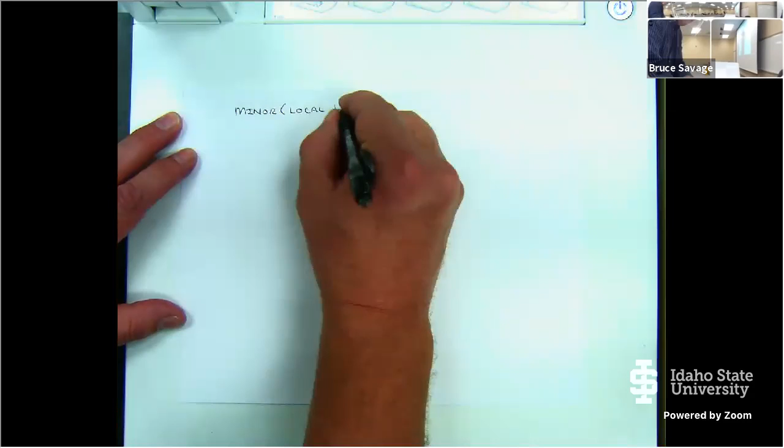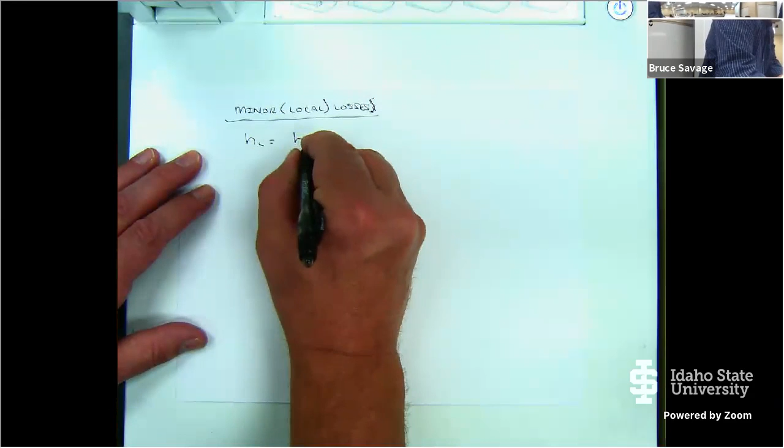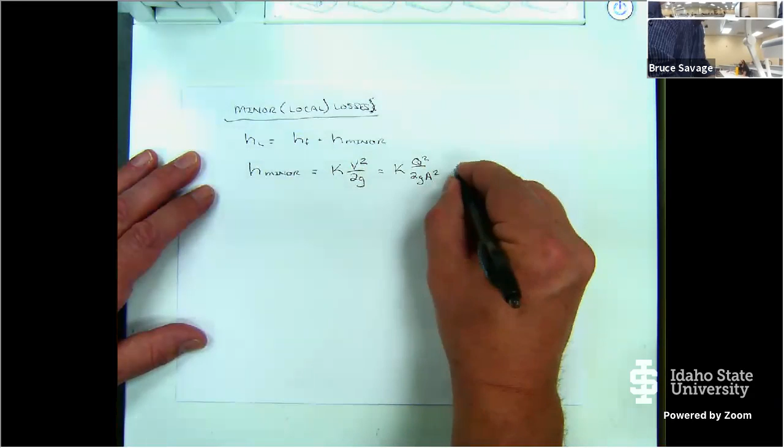or local losses. And these, minor losses, we've already defined equation-wise in this class. We said that the total head loss is equal to the friction plus the minor losses. And the minor head loss is equal to K times V squared over 2G, or we could change that to K times Q squared over 2G A squared, where dimensionally this has units of length. So it is a head loss, just like friction loss. It has units of length because the velocity head has units of length, and K is dimensionless. K is the minor loss coefficient.

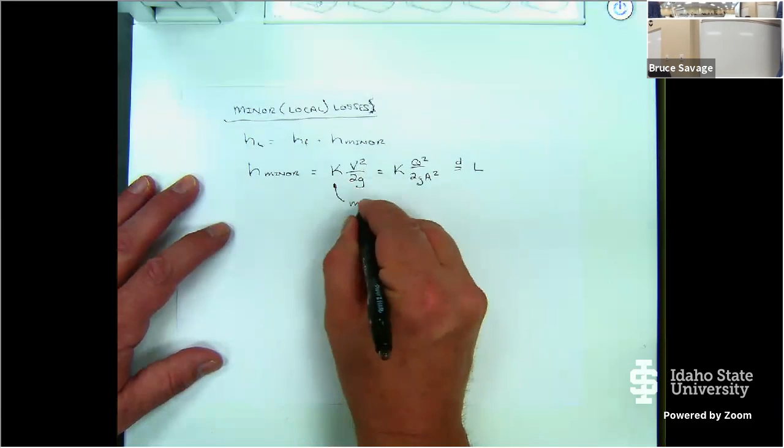So minor loss coefficient. We typically find K by looking it up in some table, on the internet, in some book, or from the manufacturer. A lot of times manufacturers will supply Ks for select items. You're probably not going to find it for a pipe elbow - if you go down to Home Depot, you have to pull that out of the table. But if you're buying a select valve, most likely the manufacturer has already had it tested, and they'll give you a K value, or they should if they're a decent manufacturer.

I want to note this because your book covers it in one section. There are other ways of finding the minor head loss, and they are actually more physical, more physics-based, using the momentum principle, but they're very academic, if you will. They're not very practical, so it's better to just use what's used in practice - it's quicker, it's simpler, and it works.

The part in the book that talks about flow going through an expansion does a momentum analysis - it's great to help understand fluid flow, but it's not used in practice. So I'm going to move this, and hopefully you guys can see what's on the board.

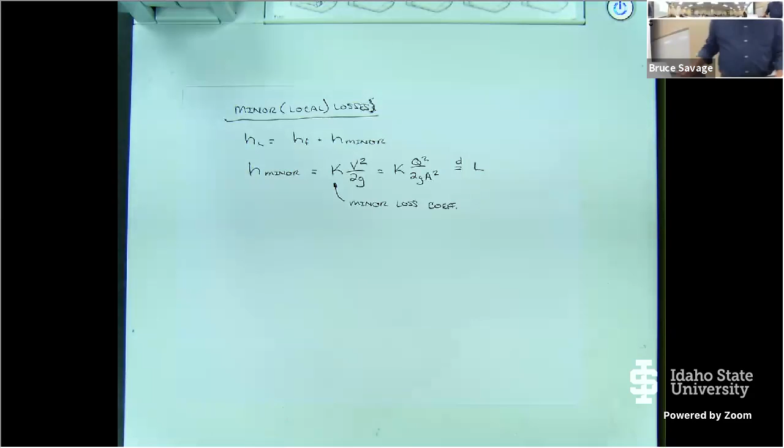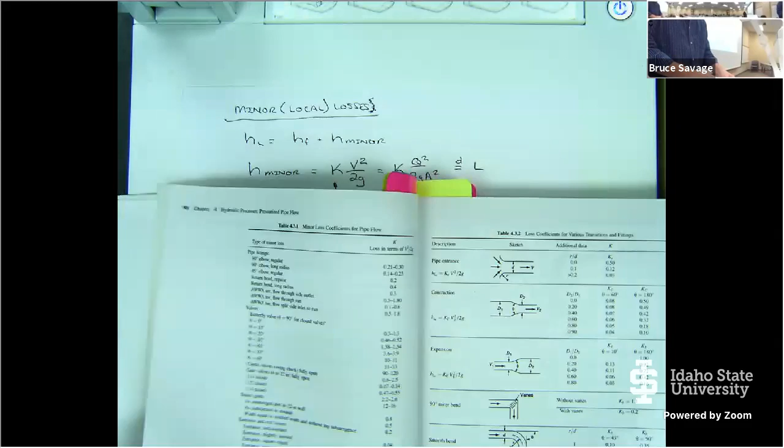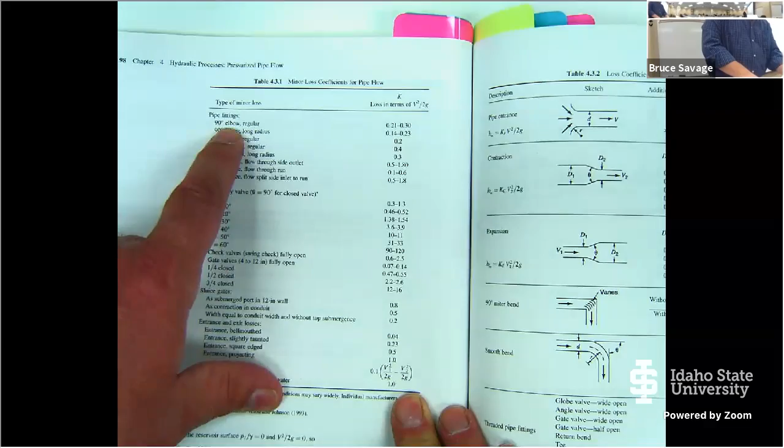If you open up your book, we have in chapter 4, table 4.3.1, minor loss coefficients for pipe flow. Let me zoom in here a little bit. It's just not very focused, is it? Well, I don't know how to bring that in better focus, but you've got a 90-degree elbow at the top, regular. Let me zoom in on that - maybe that'll bring it a little better.

Okay, and you can see that there's a range. Now, in the absence of any better information, you're going to take the middle of the range. Why would we necessarily take the extreme of 0.3? What would be the rationale of why not take 0.3 rather than say 0.25 or 0.26?

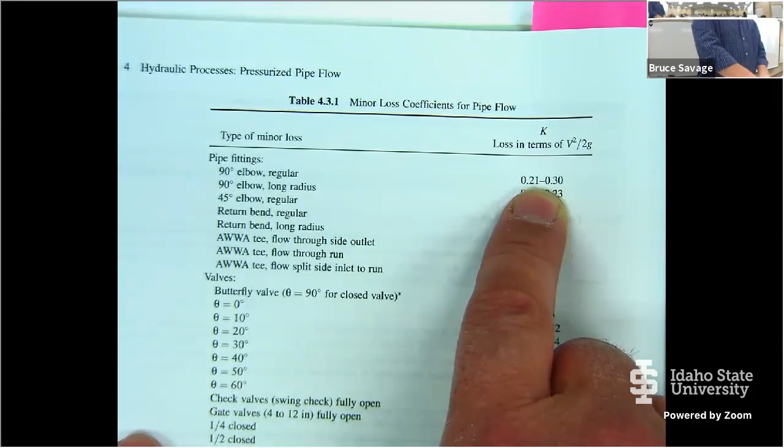I mean, we're engineers, we tend to be risk averse. So wouldn't it be better to be more conservative and pick the higher value? And that argument is indeed true - it would be more conservative to pick the higher value. But would it be better? Well, it depends on who you're trying to please, right? And there you go, cost comes into play. It's very expensive to put pipe down in the ground. So unless you have a valid reason, you don't want to over-design your project because it's going to cost a lot of money going in the ground, and it may not be worth anything.

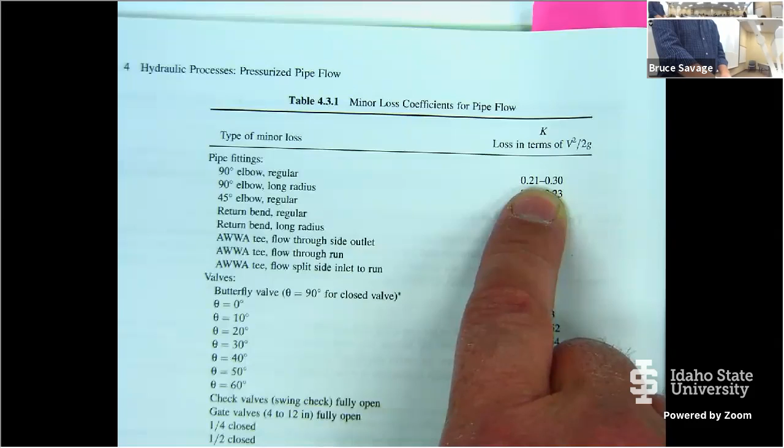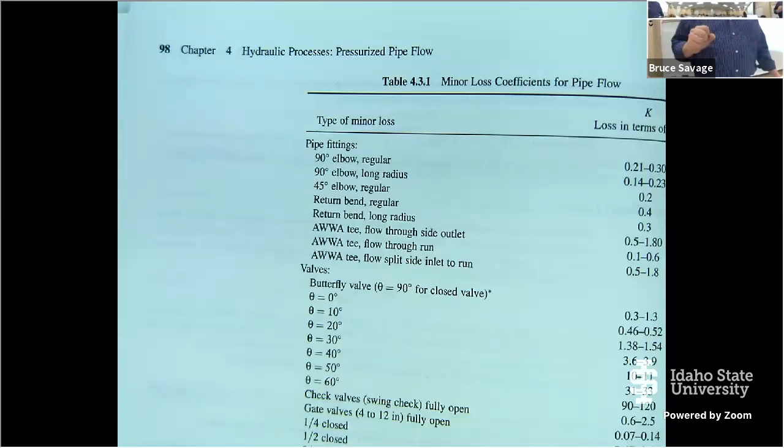And that's why we hire engineers. You guys heard the definition, or the difference between an engineer and an architect? You guys ever heard that? No? Is anyone here related to an architect? You better check online - I don't see any hands. Okay, good, I can tell this joke. The difference between an engineer and an architect, civil engineer and architect, is a civil engineer can do for $1 what any fool can do for 2, and an architect can do for 5. Okay? Now think about it - they like to do things really fancy, and I like to poke fun at architects, but you know, they actually do provide a good service.

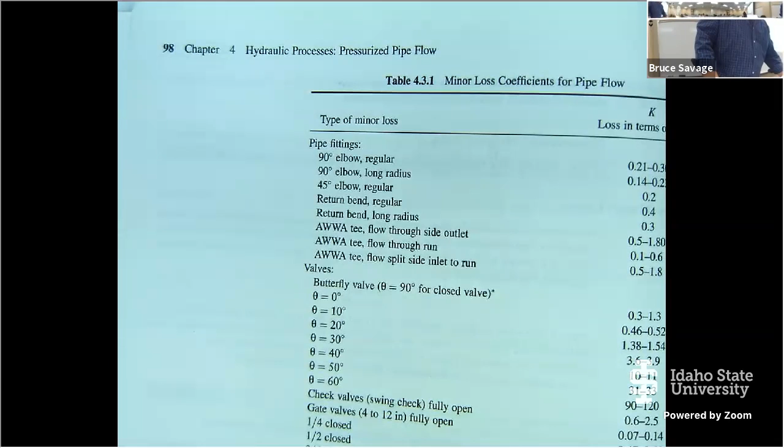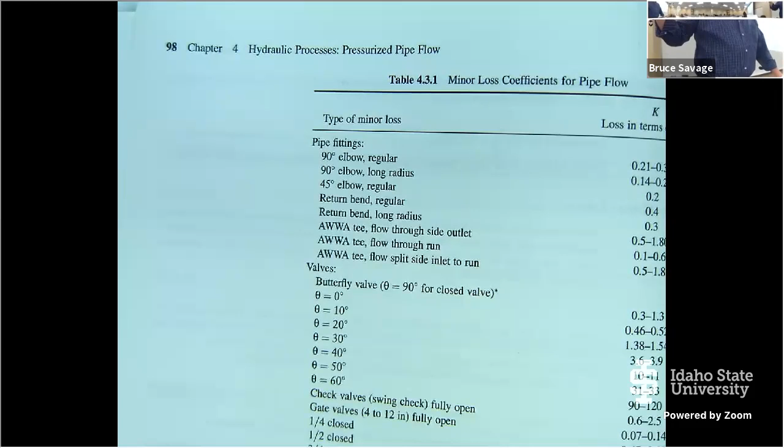But for most of what we do as civil engineers, the second part of that joke actually has significant meaning. A lot of what we do, most people could do, given enough money, right? You want a road somewhere, could they go out and build a road if they knew how to work a dozer? Sure. Would that road last? Would it be high quality? Would the cars put potholes on it and all that sort of stuff? Well, probably. It probably would over time. So we know how to do things using the properties of the materials to last longer and to save money.

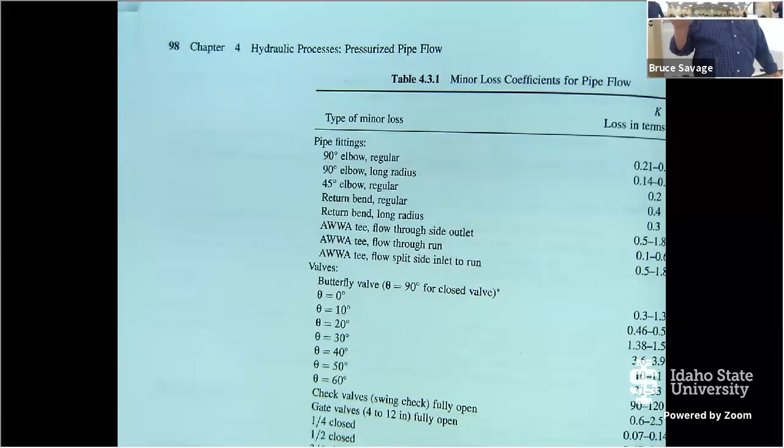Now, there are select things that we can do that they can't. And I'm not trying to diminish what we do as civil engineers. But building a building, you know, we throw up a beam. Well, could they just oversize it? Well, sure they could. Now, would that be as good in an earthquake? Maybe not, because sometimes when you oversize things, it's bad. So there still is this select area where they couldn't, but a lot of what we do, given enough money and time, yeah, sure, they could do it.

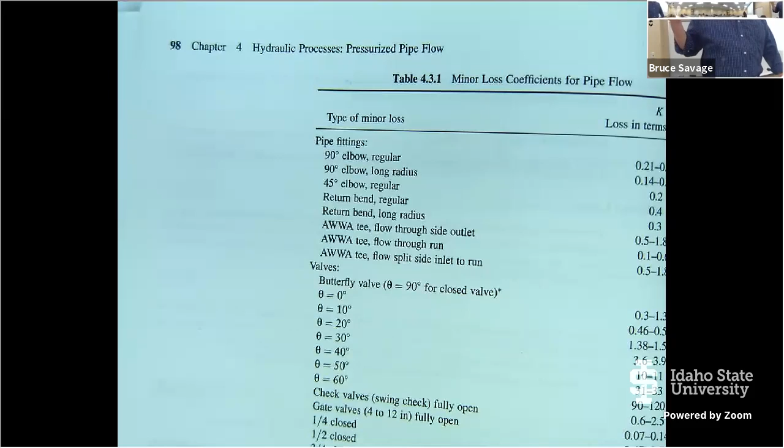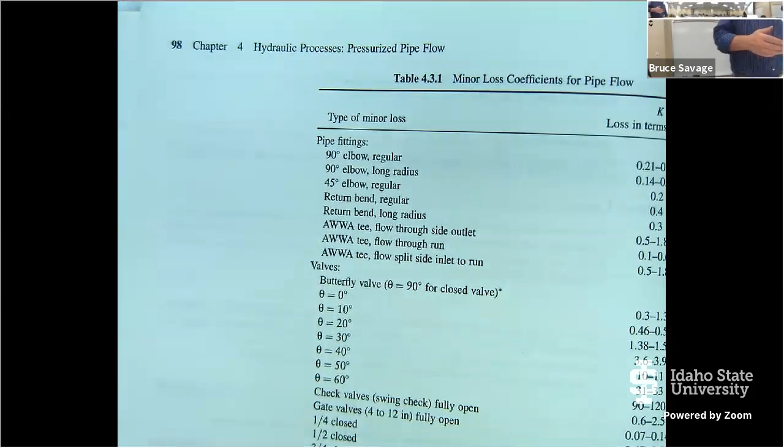Okay, so we want to save money, but at the same time, we want to make sure that it's safe, reliable, lasts - we get a good life cycle out of it. So while I'm preaching the benefits of making sure that we use correct values here, reasonable values, not extreme values, I'm also going to share another story, because I don't get to teach the engineering hydrology class, and I used to be able to teach that one.

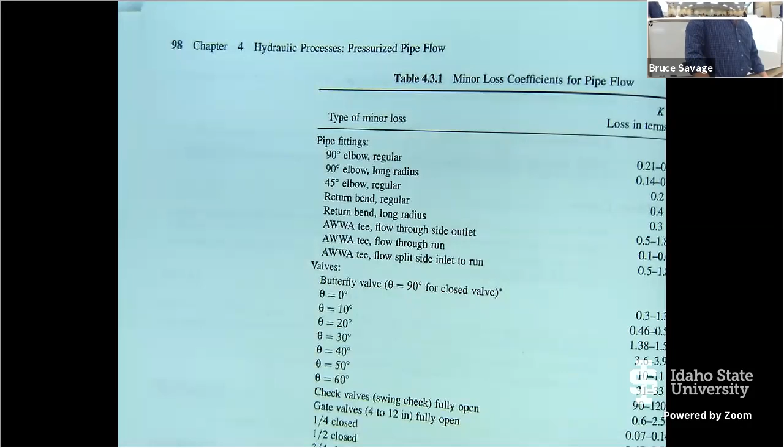Just being chair doesn't allow me the time to do that. But when I was working down in Louisiana at McNeese State University, I had a guy contact me. He was another engineer, a chemical engineer, reasonably intelligent, but he just built a house in a neighboring town in a new subdivision. And Louisiana, as you may know, has problems with flooding.

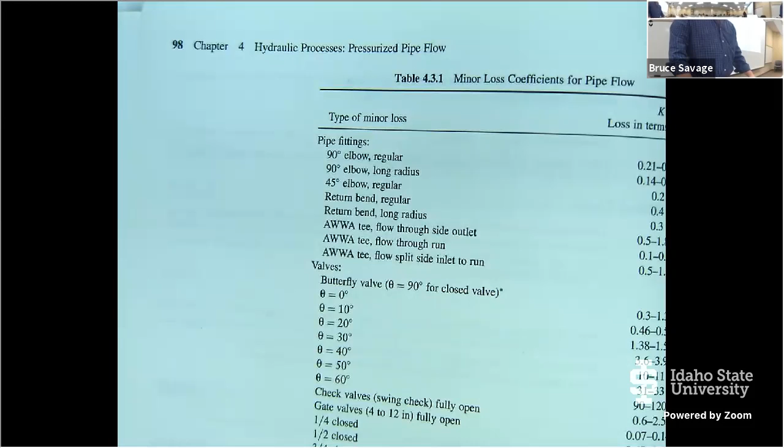Lake Charles has problems with hurricanes right now too. I've heard you guys talk about wind, and it's been pretty amazing to see the wind that has occurred around here, because I've had some neighbors that lost trees and I've been picking up branches the last couple of evenings. But I'm glad I'm not in Louisiana right now. We lived there, went through one hurricane, and have friends down there and see what they're going through now. It's way worse this time.

But anyway, I diverged from the story. So they get a lot of water down there, all right? 40 inches a year, approximately, is what the rainfall rate is. So, you know, 4 times what we get up here.

Brand new house, and had lived there 3 years and already had flooding issues in two of the years. Now, the flooding issues weren't terribly serious as far as getting in his house, but they'd come right up to his threshold at his door. He's like, this is not good, you know. These weren't even bad years. It wasn't a big storm, and he's like, we got to take care of this water.

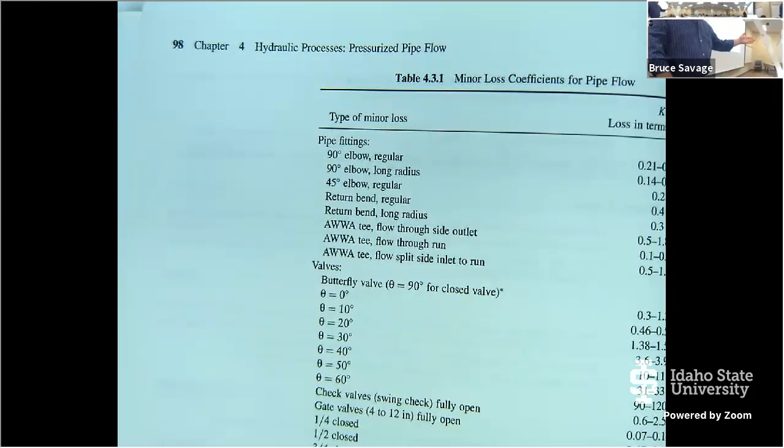The developer wanted to build more houses, and had a plan, went in and wanted to get the plan approved, and some of the people that already lived there showed up and said, well, we think there's a problem, we need to resolve this.

Well, if you remember engineering hydrology, most of you, I think, have taken that. There's two methods to calculate peak flow, peak discharge. Well, there's more than two, but two common ways for relatively small areas: the rational method and the NRCS method, right? Or the SCS - depends on if you go back far enough, it's the SCS, or TR55 is another name for it. And both of them calculate peak discharges, and there are assumptions in each of them, all right?

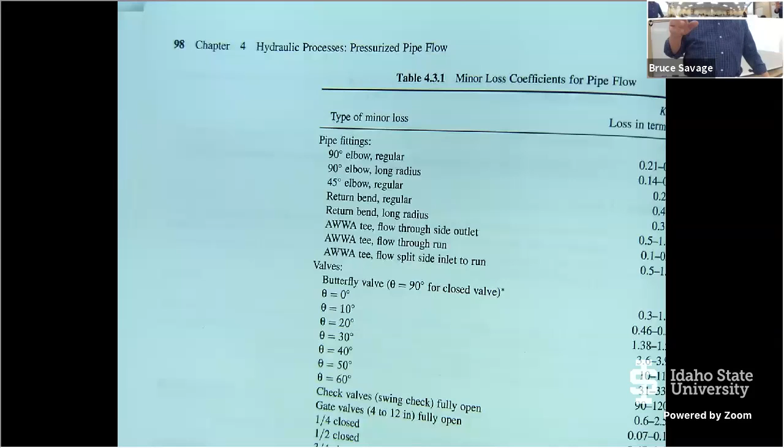So he brought me the set of plans. So the developer went to what's called the police jury, which is essentially the county commissioners there. It's a different system down there. And they looked at it, and fortunately the parish engineer - because they're not counties, they're parishes - said, well, we got a lot of people complaining, so, I don't remember exactly, it's been too long, but I think he used the SCS method, or no, he used the rational method.

And the county engineer said, well, why don't you go use the SCS method? So he did. Well, not only did he use parameters that were extreme on the other end. Rather than like the 0.3, he used the 0.21. And the SCS method actually proved to be less of a peak discharge.

So when he wrote up his report, that's what he did. He said, I compared these two methods. This one, look what this one provides. It's half the flow of this one over here. So we want to use this one because it costs us less to put in infrastructure.

Now you think about that, and so I explained it. This guy didn't want me to really, he wanted me to explain the concept and he was going to push it forward. So I did. I sat down and explained the two methods to him, and I said, this is borderline unethical to know that one method produces a certain flow rate, the other one's lower, so you're going to pick the lower one when you already know that there's flooding issues out there. Now, if you didn't know there was flooding issues out there, then I guess you could argue it. Like, yeah, I'd be a little mad too, you know.

And I don't know whatever happened. We moved soon after that. But my point is this: use a little common sense. Realize that you have a reputation, your personal reputation, and so you want to do a good job on both sides of the coin. You want to save money for your client, but also make sure that the project is doing what it's supposed to do.

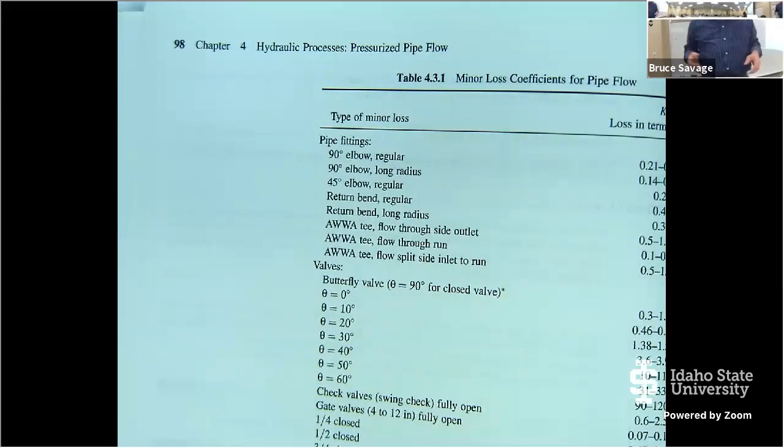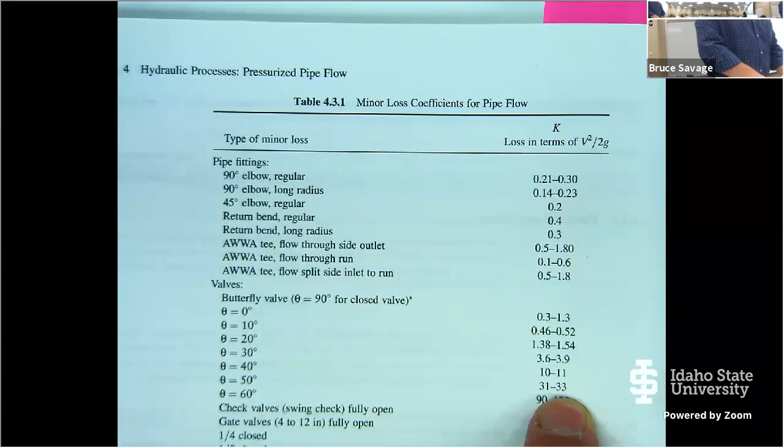Okay, so enough on that. Back to this. As we go down through here, you'll notice that butterfly valves have different K values. That's based on how open they are. And that's true for all valves. The more you close a valve down, the higher the K value is going to occur. The higher the K value, the more head loss through your valve, which means you're burning up energy in your valve, but then you can control the flow by increasing the head loss. So you have to do a little bit of adjusting there.

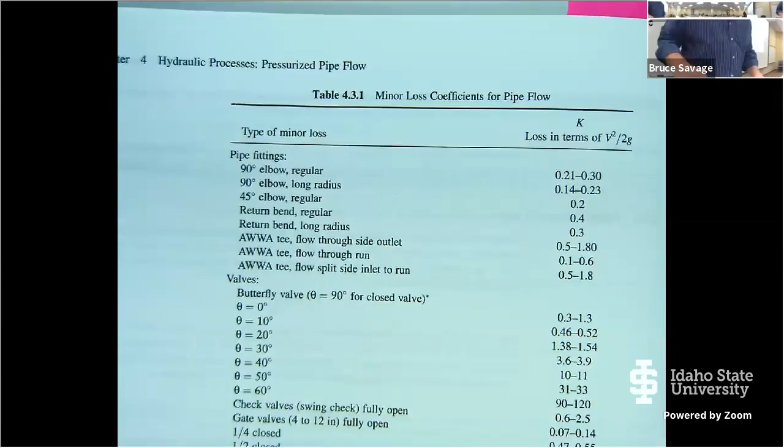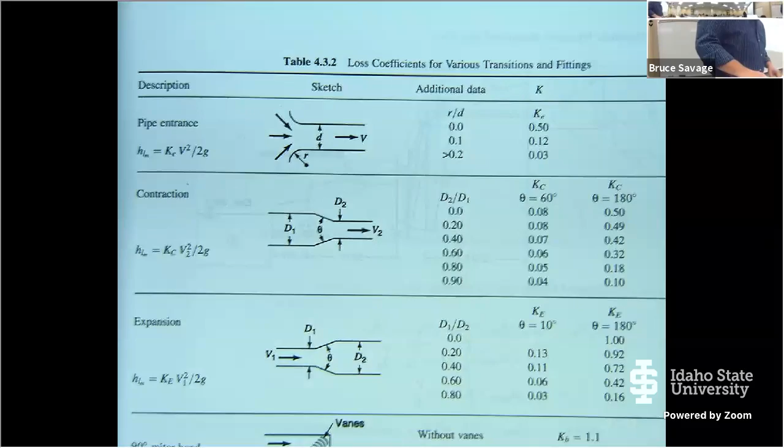We've also got some stuff over on this page here for different expansion contractions. It can be based on the radius, so you have to kind of look at the diagram and say, all right, what is my radius compared to my diameter? And that's going to give me then my K value over here. So our book has a reasonably good resource there. It's not complete by any means. And if we jump back to chapter 12, where we talk about pipe networks, they have a little more information here.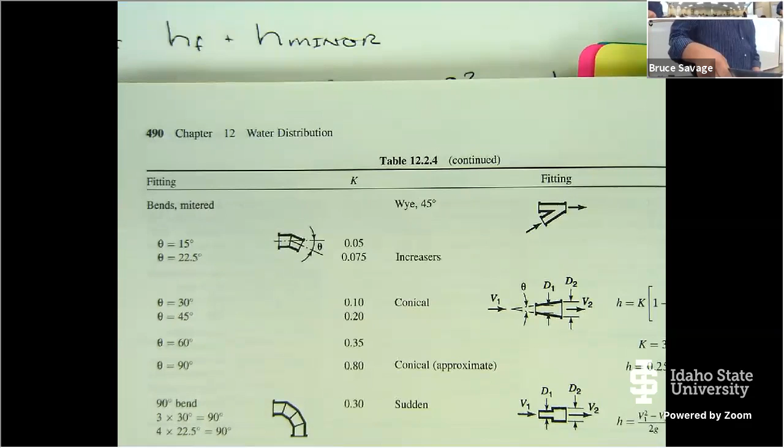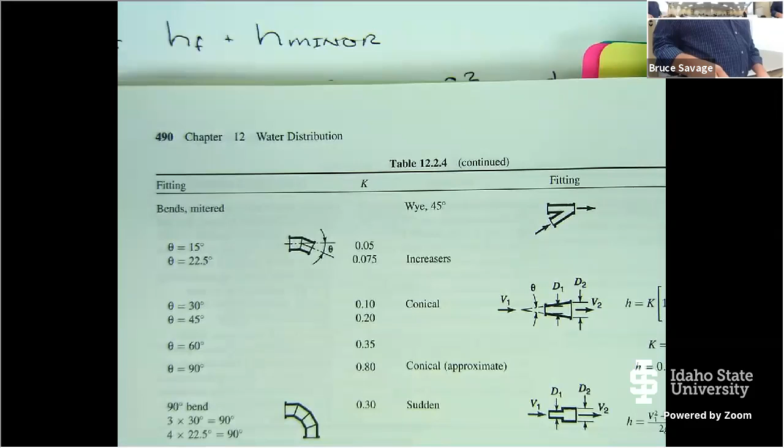Okay, yeah, they got pictures. So table 12.2.4, some more K values. Here we have a 90-degree elbow standard, 0.25. So that fell within the range of 0.2 to 0.31, right? Or 2.1 to 3, I guess is what it was.

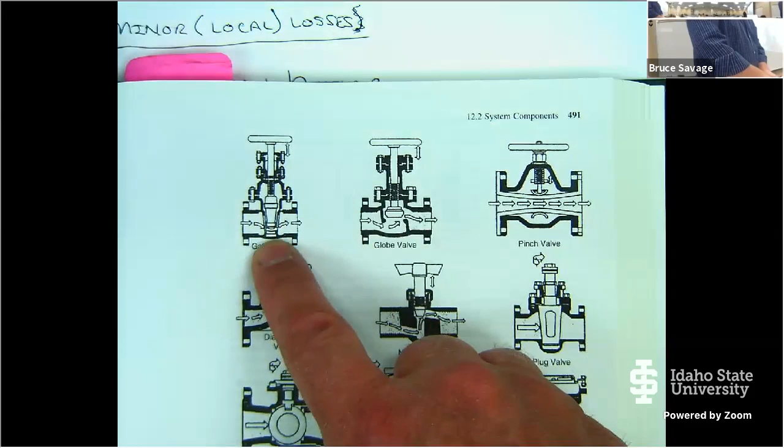We've also got pictures over here on the next page of the different valve types. I don't want to spend a lot of time going through these different types, but gate valves are very common. They're just a gate that slides up and down, blocks the flow. The flow has to go underneath the gate. Globe valves are great for control flow. Gate valves are very good for the flow on or off. So it's either all the way down or all the way off. They're not necessarily built to be throttling the flow a lot, because if you constantly run the flow down a little tiny opening right there.

And if cavitation occurs, it will eat away at the seal. So over time, if you then try to close your valve, it won't close completely because you've eroded away part of that seal. Globe valves are a little better for flow control. A pinch valve is nothing more than like a rubber liner, and then you just squeeze it down. And that's also pretty good for flow control.

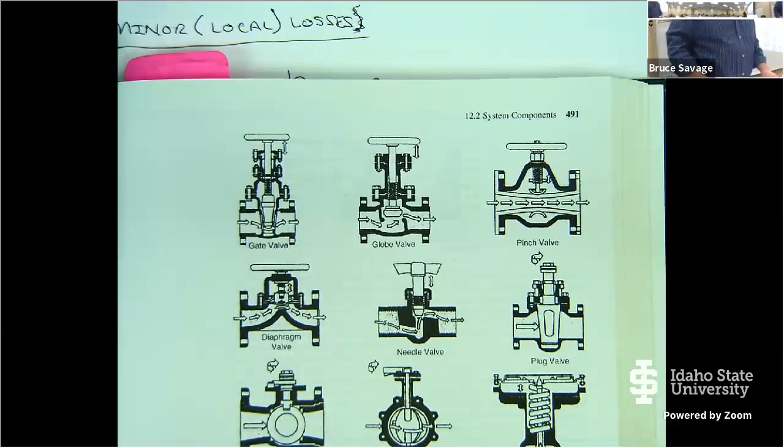Needle valve, these are a lot of what your valves are for outdoor faucets, or needle valves, or some type of a needle valve. They're just a different name for a globe valve. It's just a little smaller, and you come down and then you seal it off right there. Plug valves and ball valves, these are, if you've ever done a small system, a ball valve is just a ball that has a hole through it. And so when it's open all the way, it's like the pipe doesn't even have a valve there. It's a complete shot, straight shot. And then you can turn that ball, and that hole then turns, and flow has to move around through that, and that creates a constriction as well. The other one that's important is check valves, all right?

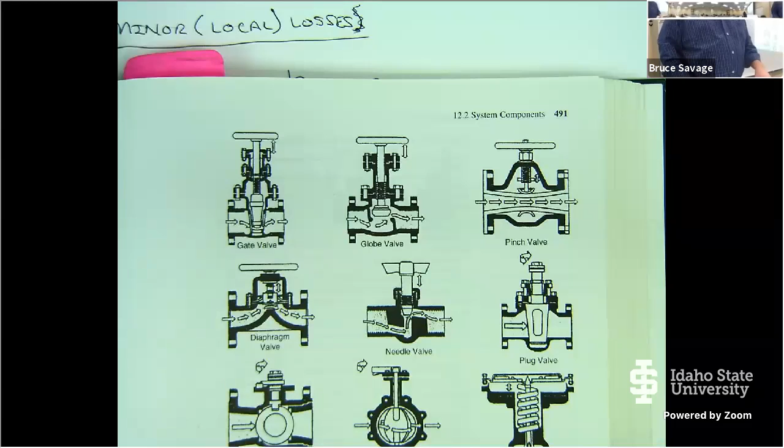A lot of what we do, we want to make sure our water system's safe. So if we have something fail, let's say a farmer's out watering his cows and he sticks his hose into the tank. The cows stick their nose in there and get grass and other stuff into the water. Over time you get a lot of biological growth in that tank. And the cows call that flavoring, right?

But if the system that hose was hooked up to failed, and that tank happens to be higher than the rest of the system, you may get siphoning, reverse flow back into your system. No big deal, right? When the system comes back up, we'll flush it out. Well, maybe or maybe not. That water may move down through the system, and some bacteria sticks around, or some of the flow heads off in a different direction, into the farmer's house. So they're getting a drink of water, and it comes down the other T, and now he's taking a drink of that flavored water, right?

So we have backflow preventers, which are a form of check valves. A check valve only allows the flow to go one direction, all right? Those are very important in a lot of different systems. Homes usually have them from the city. The water can go one way, it can't go back out into the city.

Sometimes we have to have an air gap. Toilets are a lot of times this way, where when a toilet flushes, water going into the toilet is actually above the high water mark in the toilet. Now some newer systems have gotten around that by putting the check valve actually inside the valve itself. But older systems would fill and the ball valve or ball level would come up and turn it off. But there was always an air gap there, so if anything happened in the system, it couldn't siphon back because there's an air gap. So air gaps are an effective backflow preventer as well.

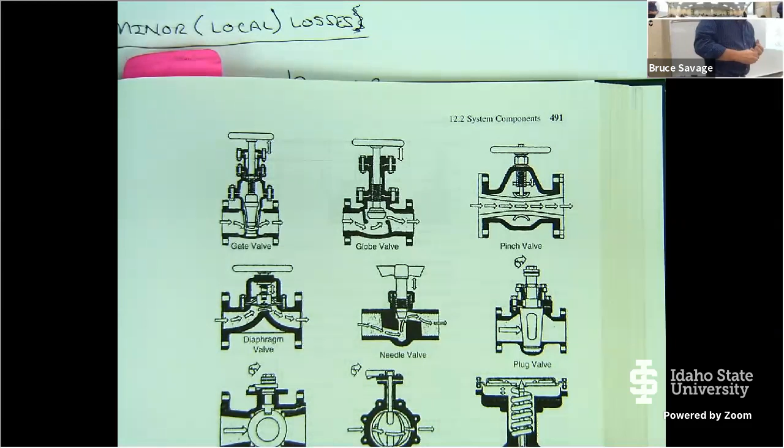Okay, all right. So let's see how we use this.

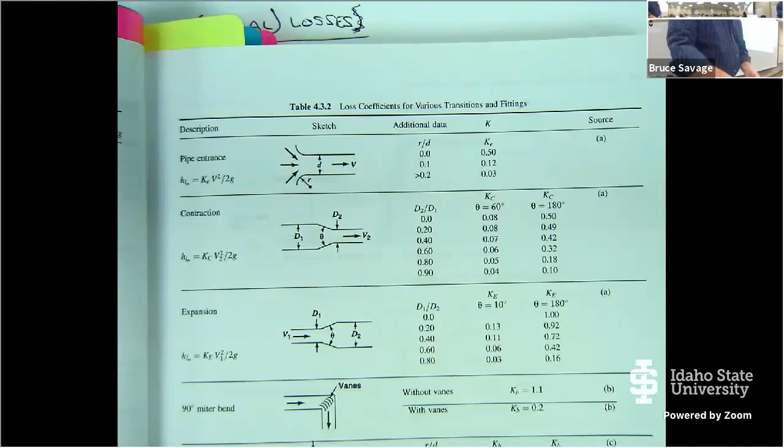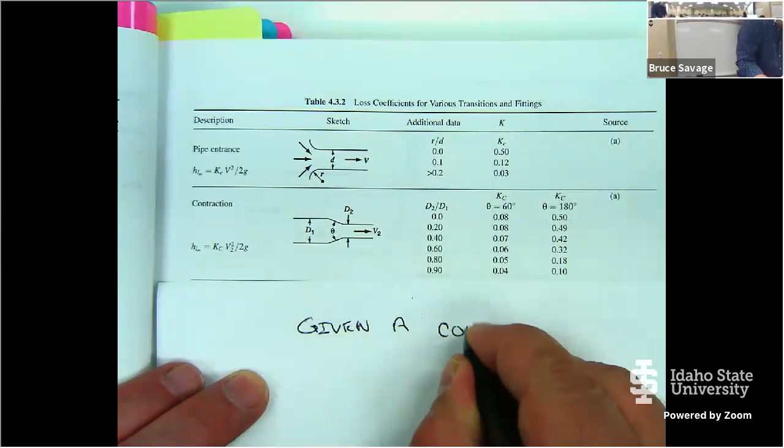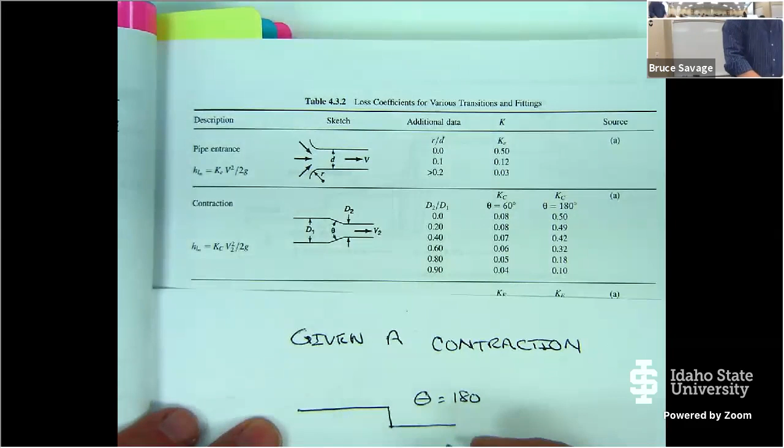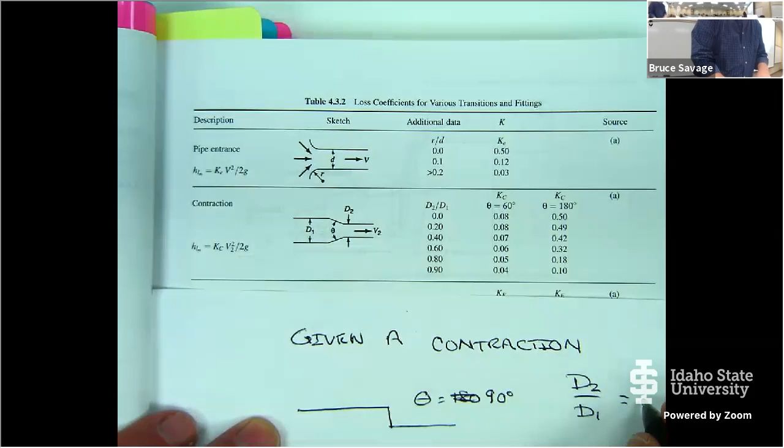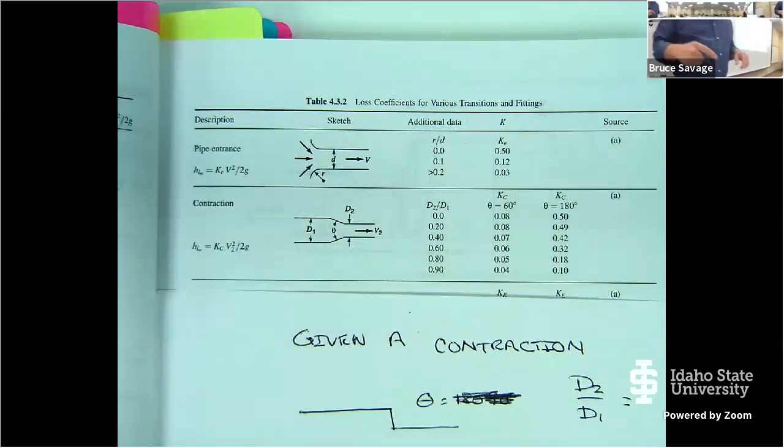So this first column is where D2 is over D1. And we're going to say that the ratio of D2 over D1 is equal to... no, wait a second, I'm sorry, I'm trying to think through this too fast. This is the ratio of D2 to D1, the diameters, right? Okay, theta is 180 degrees because the angle from here over to here is 180 degrees.

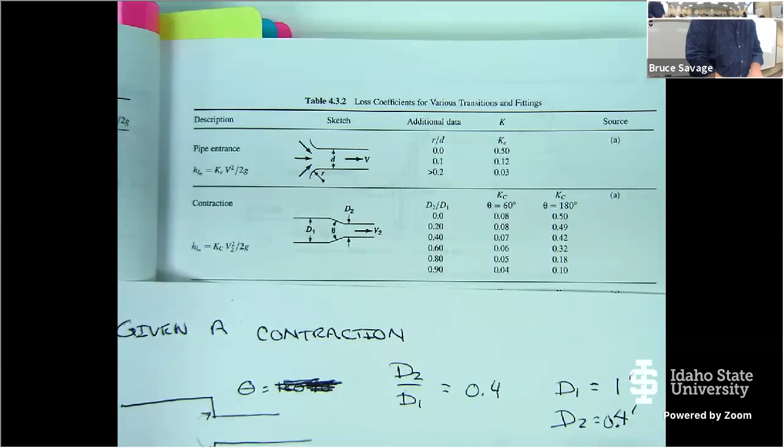So D2 over D1 we're going to use as 0.4, and we're going to let D1 equal 1 foot, okay? Therefore D2 is 0.4 feet, and we're not going to worry about being too exact with whether that's a nominal pipe size or not, but 0.4 feet, okay? And the flow rate, Q, is equal to... yes, okay, let me back out on this a little bit here. Okay, and the flow rate is equal to, let's do 8 cubic feet per second, right?

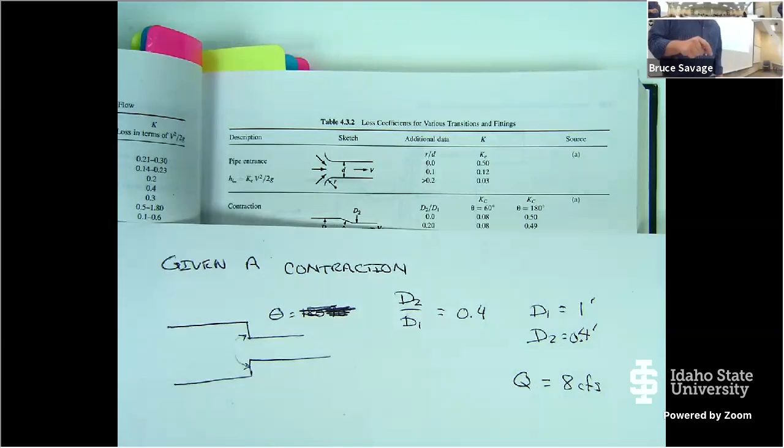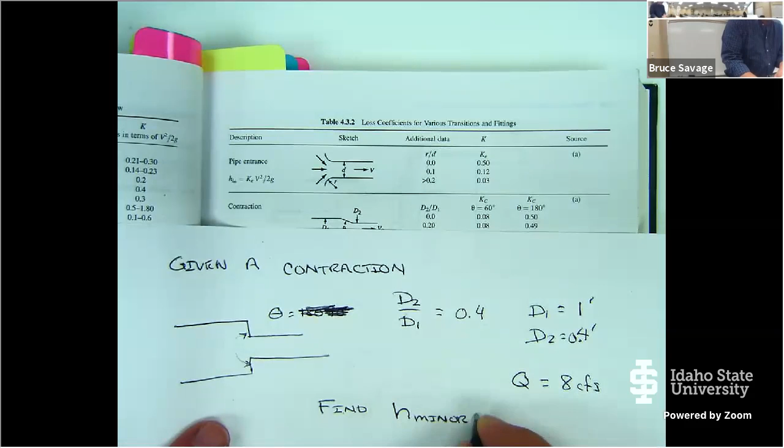So I want to know from you, what is the minor loss in this contraction? Okay, so I want you to find H sub minor for this particular contraction. And let me try to zoom back in on that just a little bit.

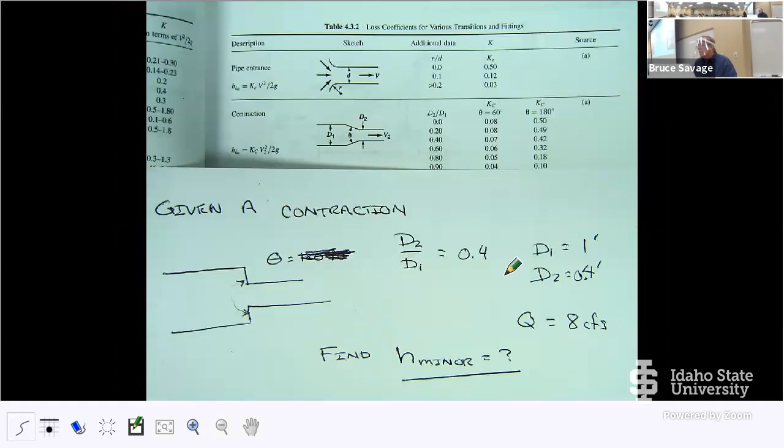I guess actually everyone's going to lose this. Can you see that okay? So theta is 180. I crossed that out, but it is 180.

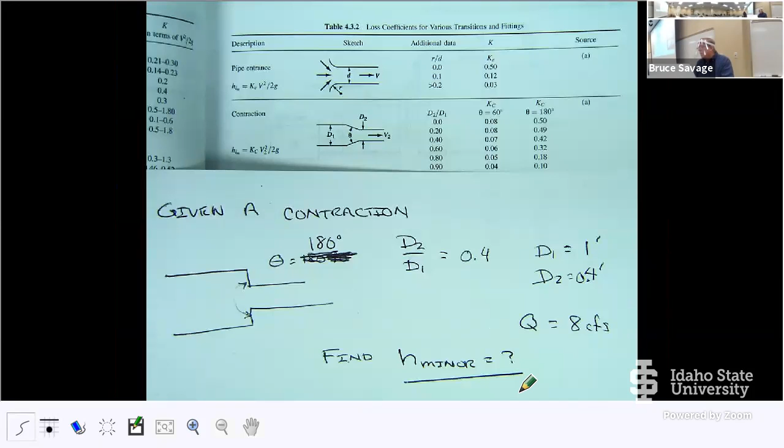Yes. We're trying to find the total minor loss through this contraction, given this scenario.

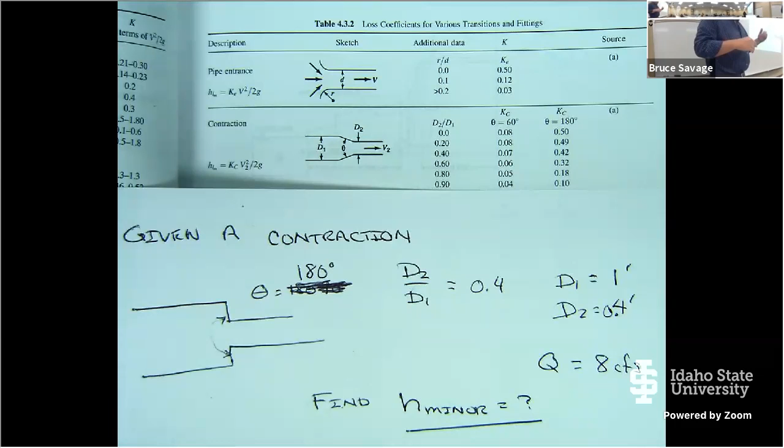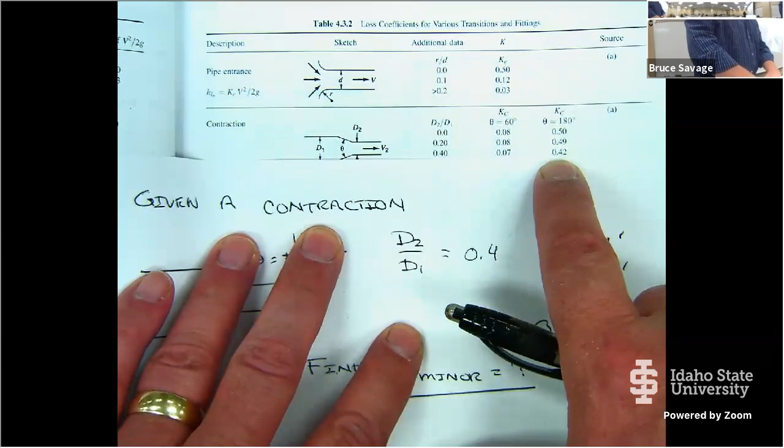So looking at this, K is equal to, or KC for 0.4 is 0.42, right? Oh, I need to get that out of the way. Okay, so the minor loss coefficient you should have found was 0.42.

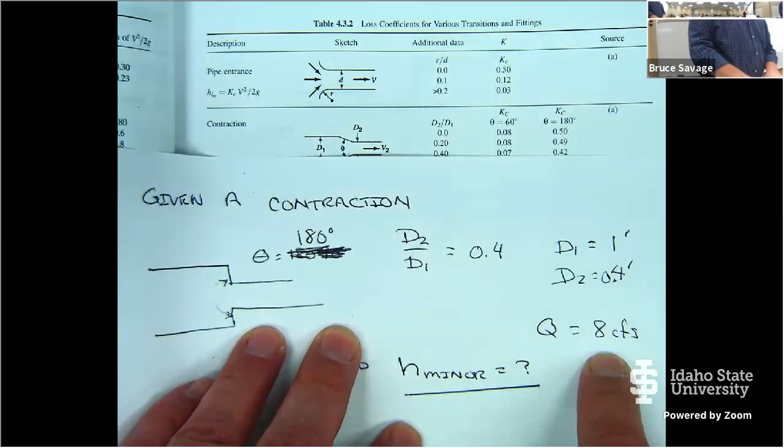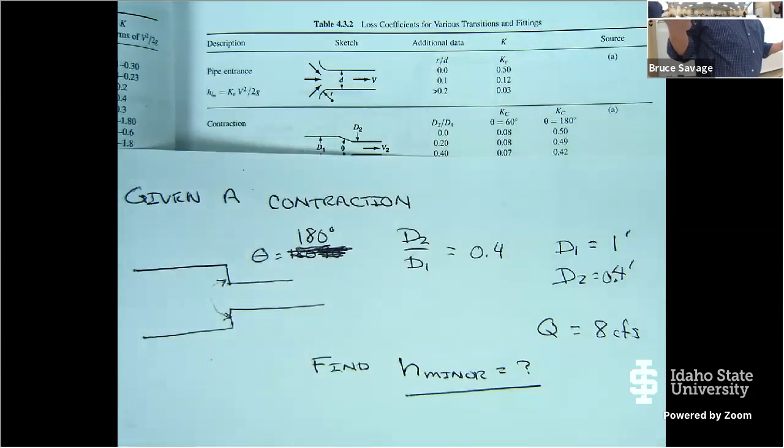All right, and then we say, okay, I'm going to stick this in the equation, but if we know that Q is equal to 8 cubic feet per second, do we use V1 or V2, the velocity upstream or the velocity downstream? And apparently you guys used the right one, and you did that because of what? The equation. The equation, good.

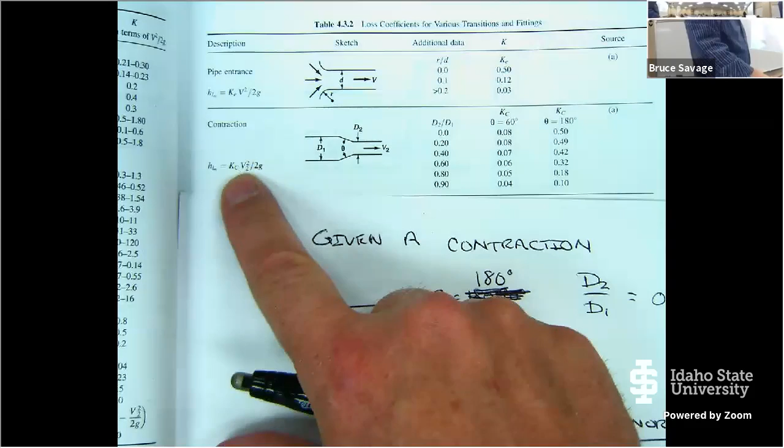So this is a pretty common mistake that a lot of times engineers will grab the value and they'll use the upstream value. They'll say, oh, on the upstream value, I got 8 cubic feet per second going through a 1-foot pipe, I can find that velocity, 10.2 feet per second, stick it in, boom, I'm good to go. But that would be incorrect, because this specific equation right here tells you to use V sub 2.

But notice that if I go down to this one right here where we have an expansion, use V sub 1, use the smaller one. Yes, as a general rule, we generally use the smallest diameter pipe. However, you want to make sure that you look at the reference you're using, because sometimes the reference switches.

For some reason, 95% of the time they use the smallest, which gives you the highest velocity, but some references like to be different and they say, oh, we're going to use the larger one. You still get the same value, you just have to use the proper equation that's correlated to the minor loss coefficient you get.

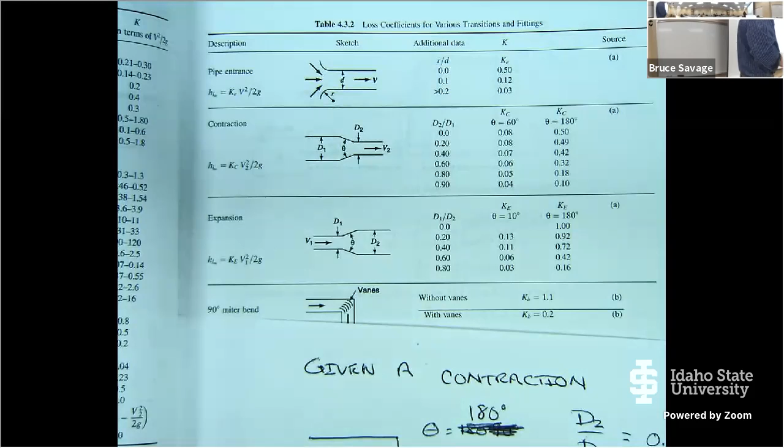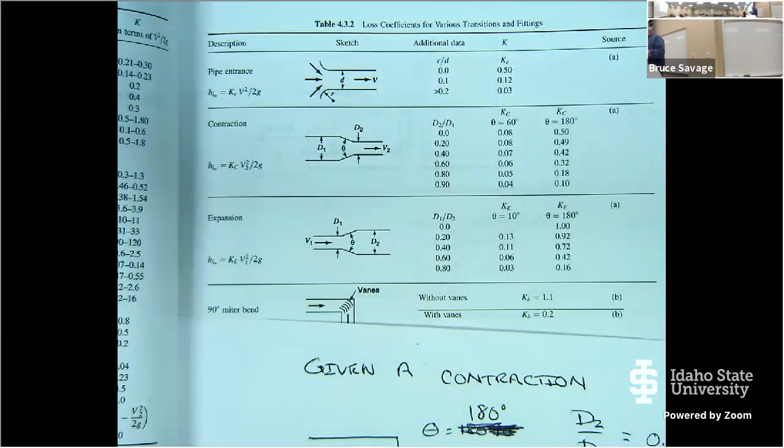I think the diameter ratio D2 over D1 is what tells you which minor loss you want. So how much are we constricting? When calculating the area, that's pi over 4 times D squared, but you have to use the right diameter. Do you use the upstream diameter of 1 foot or 0.4? How do you know?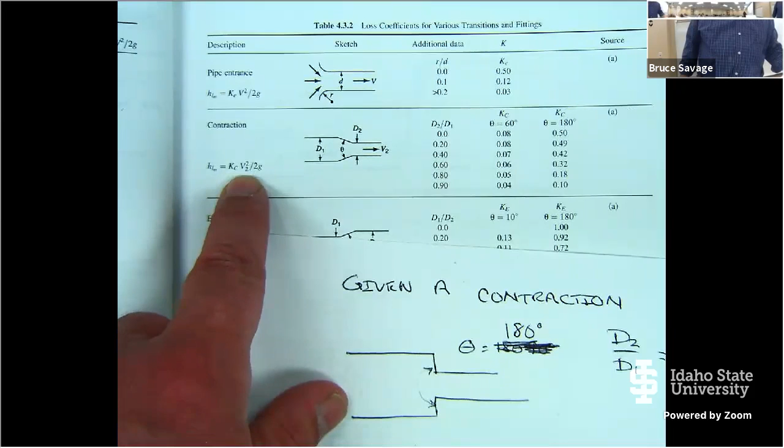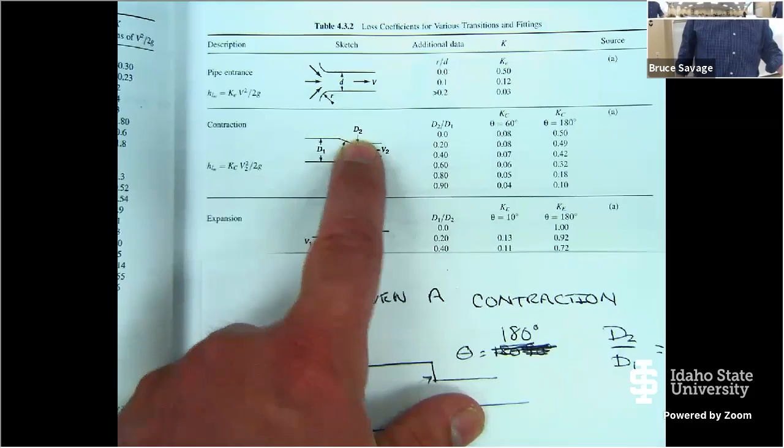You come over to this equation and see how that V has that subscript of 2. That means you come over here to the picture and use the values D sub 2, V sub 2. So you always correlate that to that equation.

Do you usually tell us if it's a contraction or an expansion, or do we have to figure that out? I'll just give you a picture and you have to decide. So contraction is smaller, expansion gets bigger.

So you've got to pay attention to what they use. Would the K value be different if they flip that around and went with the bigger one? Yes, we would have a drastically different K value.

So that's where you have to be careful. As long as the reference you're using shows that it's a higher velocity, it's going to have the K value to match that.

Would you give us a table like this on the test? Yes, I would, or at least I'd tell you the minor loss coefficient or give you the table. I don't expect you to memorize that.

Let's get back to Samantha's comment that this seems a little odd, 26 feet of head through a 1 foot pipe going down to 4/10 of a foot. Well, 8 cubic feet per second is a lot of water. That's exactly why I gave you these values: 8 cubic feet per second through a 4/10 foot pipe is 63 feet per second.

I hope you never design a pipeline that has 64 feet per second going through it, unless it's a dam outlet you only use once in a while. Like high pressure washers, if it's at the nozzle with a special design hose, then I get that. But for a municipal water system, if you've got those kinds of velocities, you've got a problem.

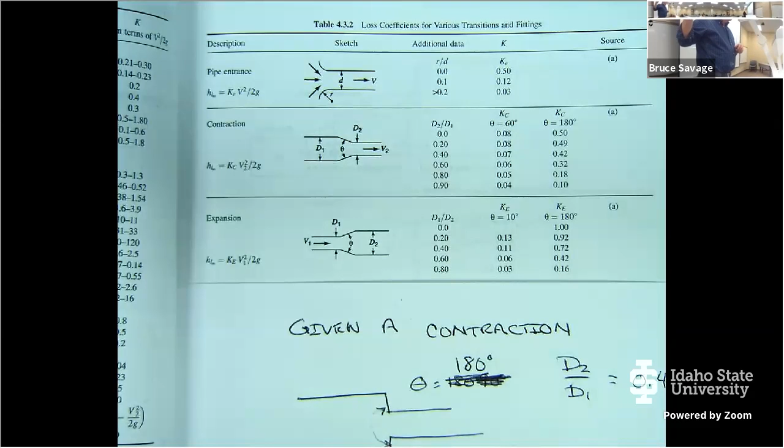It's a disc. You have a hole coming through your pipe, through your valve, and a disc that's on a spring. Oh wait, a pressure reducer... I'm sorry, I'm thinking of a pressure sustaining valve. A pressure reducer is like a contraction, except it's a valve that adjusts automatically to the correct pressure you need. Most pressure reducers are globe valves of one form or another.

Where did that go? Okay, so it's here.

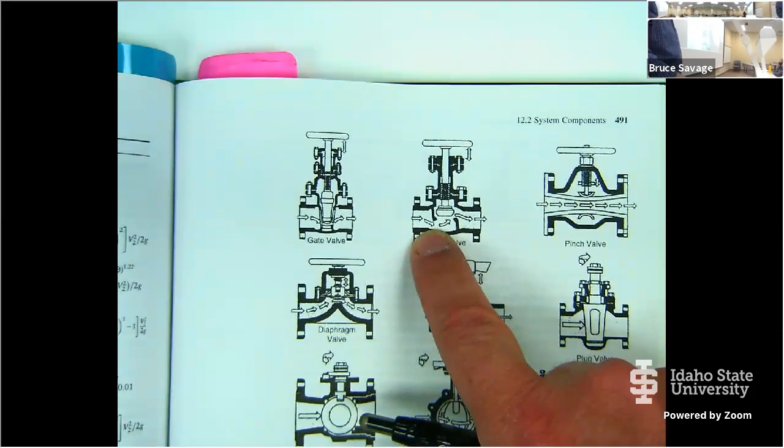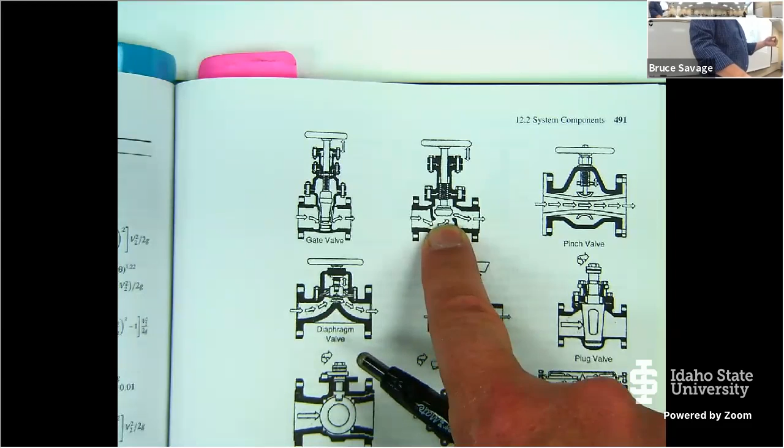If the pressure is too high upstream for what you want downstream, the globe valve starts to close. By closing, it creates a higher loss coefficient, which burns up more energy, which then reduces the pressure downstream. Would that also reduce the flow?

Over time, yeah. Well, not over time. The answer is yes, but not within the ranges that we normally work.

Because if we reduce, say we set the pressure upstream at 60 PSI. But we know we can get spikes, and it spikes up to 100, and we have this pressure reducing valve here to maintain 30. It's set at a certain depth when it's 60 going down to 30, or a certain height. Now when we jump up to 100, it gets smaller, and you say, well, does it reduce the flow?

Not necessarily, because now we increase the velocity going through the valve to create more head loss. So we're still getting the same flow rate, but the pressure now is lower because we've just burned that energy up. We're still using that energy equation.

Yes, conservation. If the downstream use is still one gallon per minute, we're still going to get one gallon per minute, because here's the thing - this is why these pressure reducing valves work. If we start using more than one gallon per minute, it means that the pressure drops below 30.

And so what does that pressure reducing valve do? It opens back up and allows the correct flow rate. So it compensates the flow rate with the pressure and balances those two out.

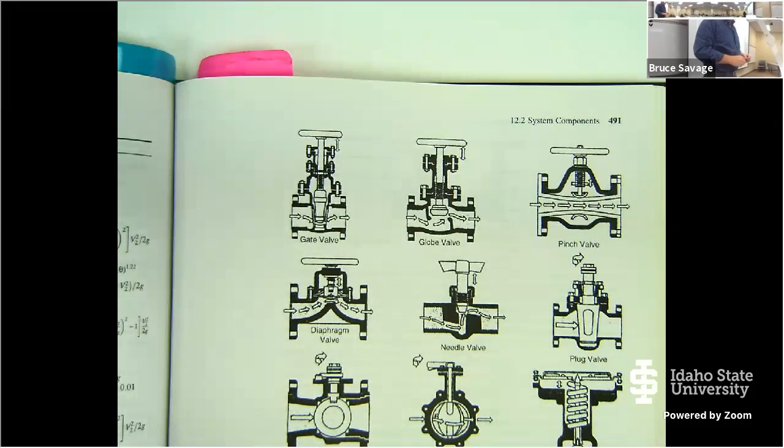Okay, all right. How much time? We got 4 minutes here. All right, so let me ask you another question.

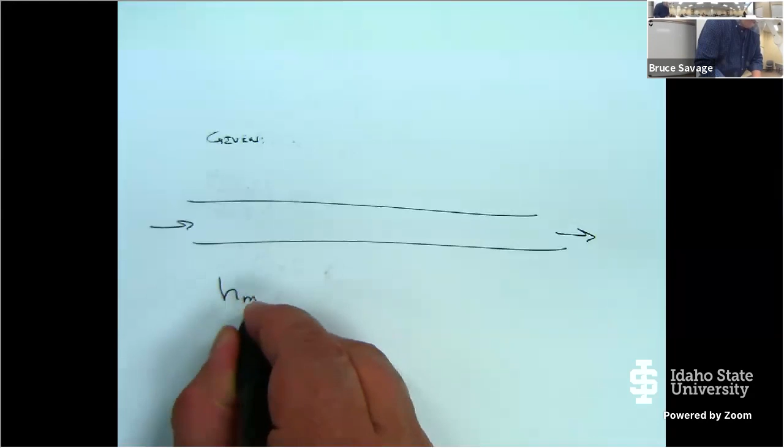We have a system now. Given a system, I'm just going to represent it as flow going in, flow going out. And I'm going to say the ratio of the minor loss to the friction loss is 10%. We don't have a whole lot of time to talk about this, but 10% of our system we lose in minor losses.

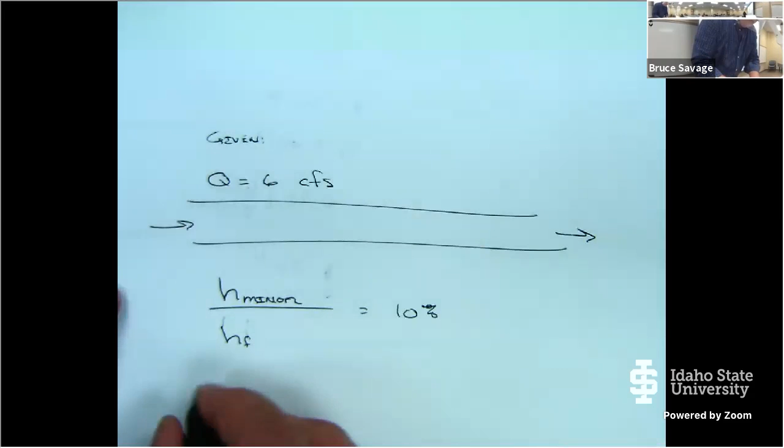This is at a flow rate Q equal to, say, 6 cubic feet per second. If Q goes to 12 cubic feet per second, what happens to the ratio? Does it go to 20? Go to 30? Does it go to 5? What happens to the ratio?

When we increase the flow rate, the higher your flow rate, the higher the friction loss. They're both a function of velocity - bingo, right there, okay? They're both a function of velocity, velocity squared, so they should both change at the same rate.

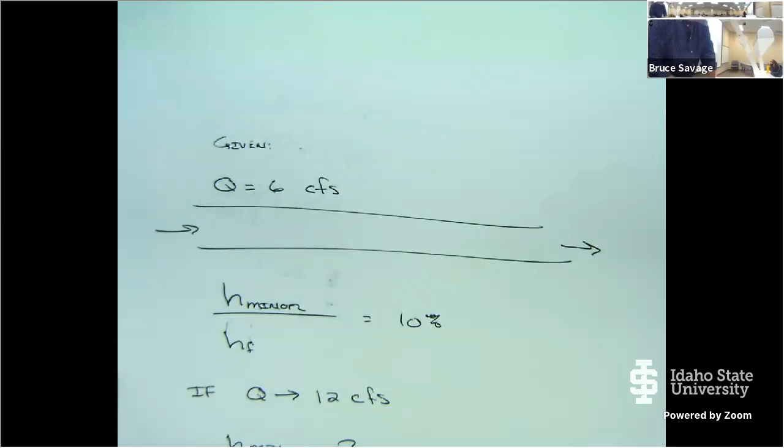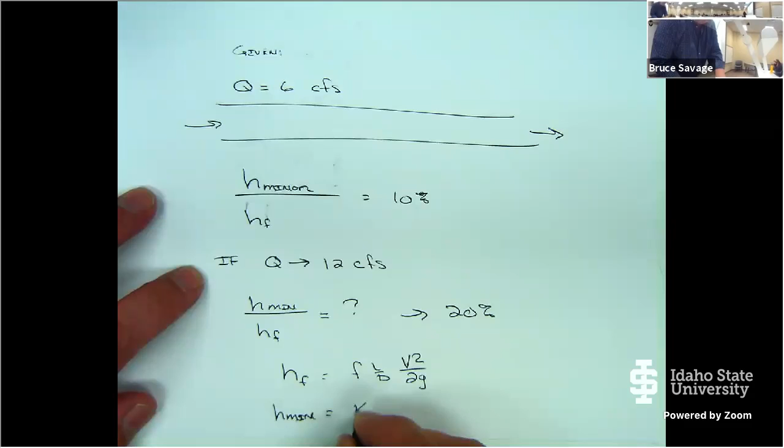Exactly. The friction loss is F, L over D, V squared over 2G, and the minor loss - let me zoom out on this - the minor loss is equal to K, V squared over 2G. Now, there's the potential that our friction factor could change a little bit because we're changing the Reynolds number, but let's not get down into the physics that tight.

If we double the flow rate, the ratio stays the same because now our losses go up. We have more friction loss, we have more minor losses, but they go up at the same rate. Any questions on that?

Okay, with that, then we're gonna wrap up minor losses. I'll give you some homework to do on those. Monday, we'll talk about energy grade lines and hydraulic grade lines, and then we get to move into pipe networks.

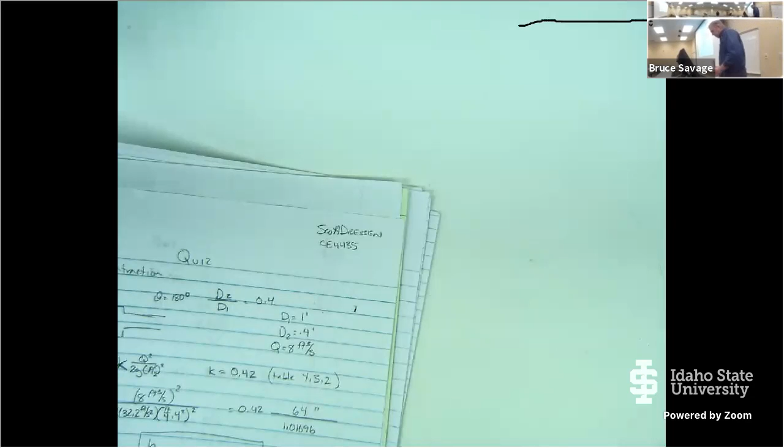Hi, Dr. Savage. Have a good weekend. Thanks, you too. Thank you.

Oh no, hold on just a second here.